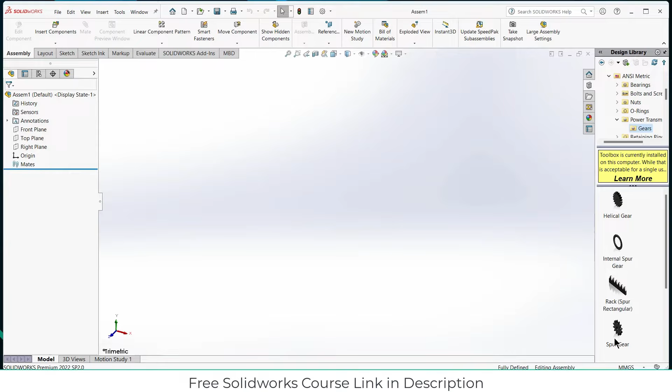So what will be the module and number of teeth? In my case, I will choose the number of teeth to be 40. 40 will be fine for me. Let's increase it a little bit more to 45. What next? Let's increase the width to 10.

You will know. So select this face, press Ctrl plus 8. Click on sketch, click on Convert Entities. Press Ctrl A, Ctrl C to copy the sketch. Click on exit mode, right click, suppress the motions.

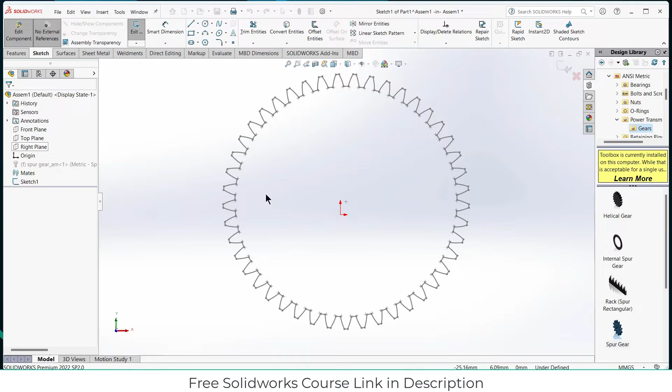Click here, click on New Part. Select the right plane, press Ctrl V. Features, extrude, 10 mm is fine. Click OK. Now delete this gear.

A question arises: why am I not using this gear? The reason is that I'm going to modify it. If I modify the library gear, it will ruin my whole library. So never modify this library gear, for example by doing an extrusion cut or something else. You will ruin your whole library and need to install SolidWorks from scratch. This is a common issue with me, and I really regret it a lot. So don't make this kind of mistake like I've done.

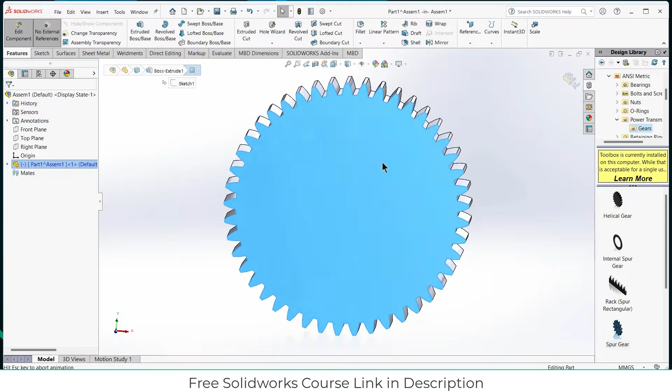Now let's create a hole, 10 mm. Extrude cut through all, and one thing: make sure that no external reference is checked on. This is a common issue that I saw many of my subscribers complaining about, so please watch carefully what I'm doing.

Now exit the edit assembly component mode. Oh, I have to make one more, sorry for my mistake. So I will go here, right click, edit sketch. I will make one more.

I guess here, 20 mm. Okay, 20 mm is quite far away. Let's make it 18 mm.

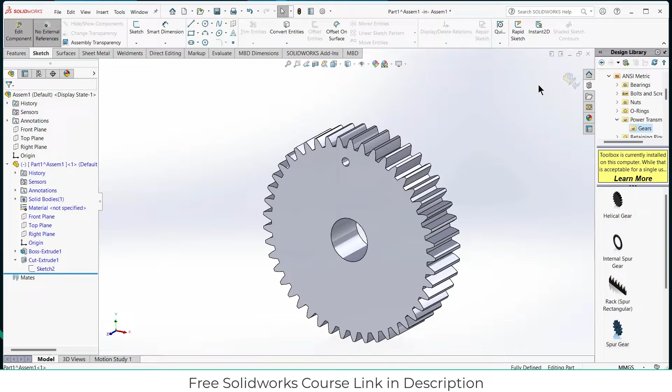Select this point and this point, make it vertical, and select this one and this one, make it coincide, and exit the sketch mode. I think it automatically picks it up. That's a good thing. Now first exit the assembly component mode, select the right plane.

Click on sketch. Now click on midpoint, draw the midpoint line like this. If I remember correctly, my gear has 45 number of teeth. So 45, 90. Let's make it 45 here as well.

Before I exit the sketch mode, escape. Select this one, make it construction geometry. Exit the sketch mode. Now if I drag it, I will use something called constraints.

Select this point and this circle. For some reason, the concentric option is not showing, because I want to make it concentric. Select this point and this point. Oh, the concentric option is there. That's basically what I want.

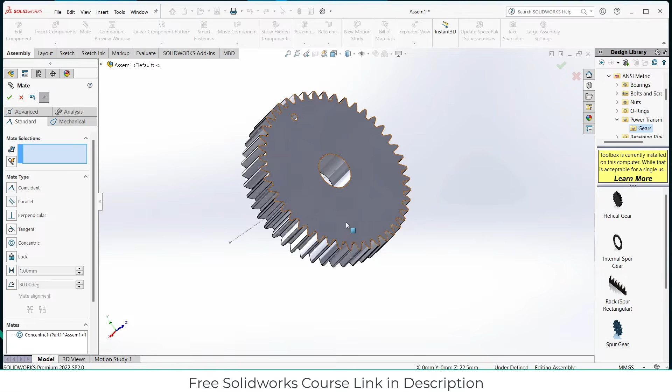Select this face, and what I have to do, select this one. Click OK. Press Ctrl plus 8. I press Ctrl and right click, drag this.

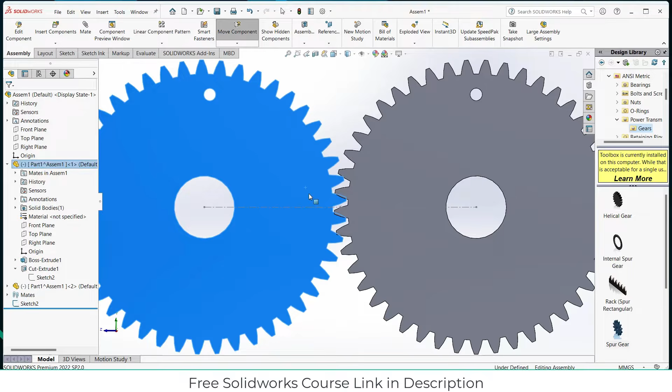Click on mate, select this point and this one, concentric, click OK, select and move this side here. Okay, it's rotating, that's basically what I want.

Select this face and this face, make it coincide. Okay, one step is done.

Now what do I have to do? Let's see, I think I have to use something called gear mates. So I will go to the mechanical tab, click on gear, select these two faces and click OK. A question is why I'm clicking OK - the value input here is wrong.

Here's the thing, the gear ratio in this case will be 1. So 10 by 10, or 100 by 100, or 1000 by 1000, what will be the gear ratio at the end of it? It will be 1. So that's not an issue. As you can see, it's also working quite great.

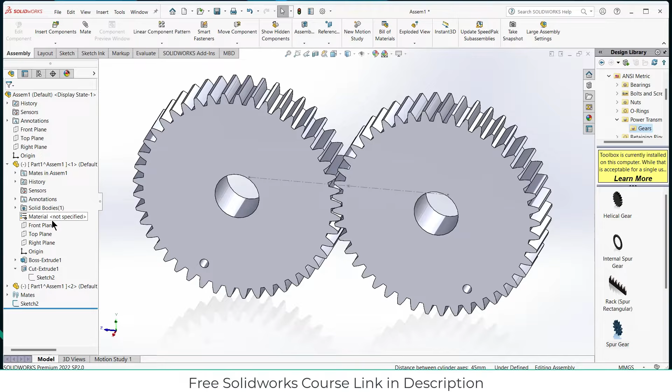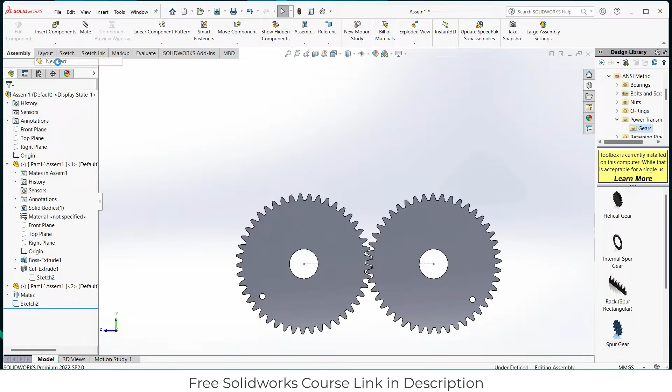60, 60, 45 divided by 2. Escape, select this point and this point, make it coincide.

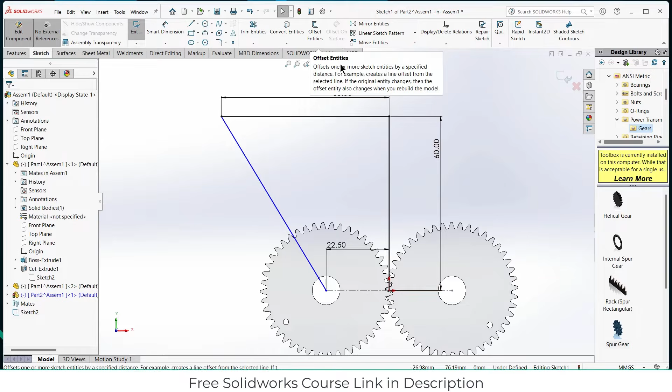Now what? Before I do something, select this line, make it construction geometry. Click on mirror entities - what I want to mirror is these two lines. About what? This line.

Click OK. Now click on offset entities, select this line. Click on bidirectional, click on cap ends. Reduce it to 5, or I think not, let's increase it to 8.

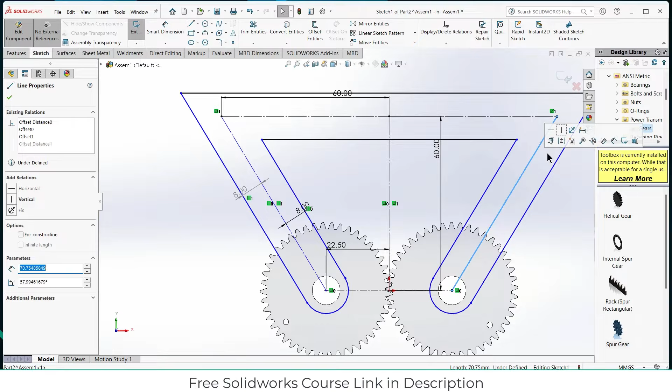Click OK. Now select the main line, construction. By the way, while I was doing the offset, I forgot to click make it construction, so there was a need to repeat the step - that was my fault.

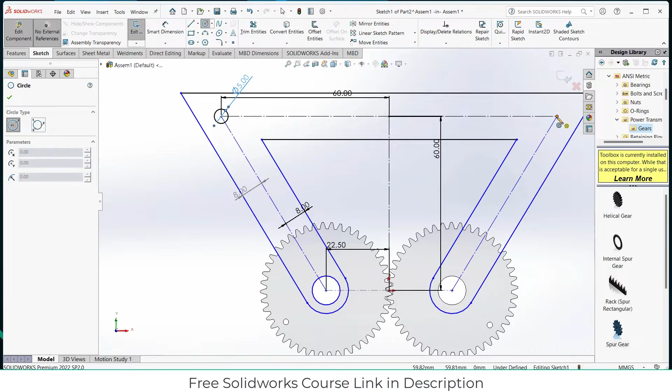5 mm is fine, 5 mm. Features, extrude - how much? 5 mm is fine. Click OK.

Exit the component mode. Make it back.

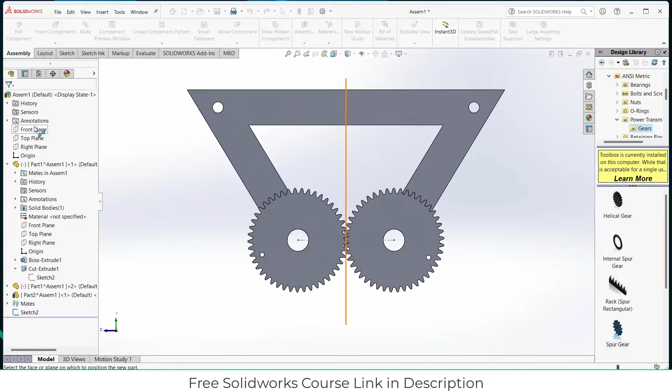Now what I have to do is click on insert component, click on new part, select the front plane. I will use this thing.

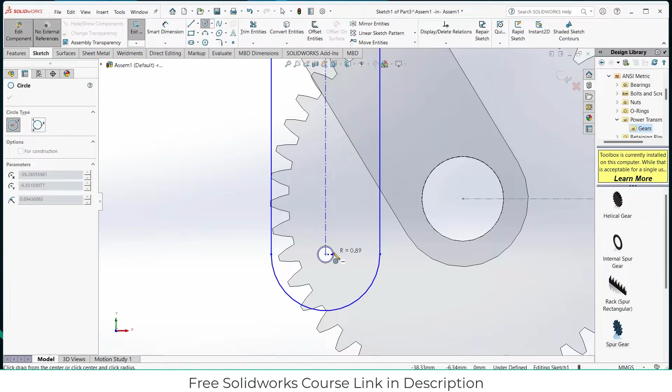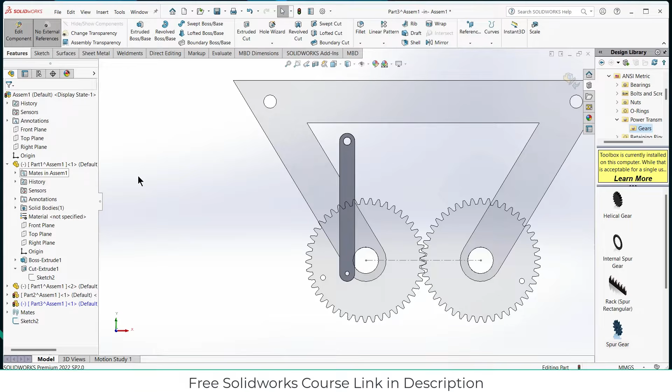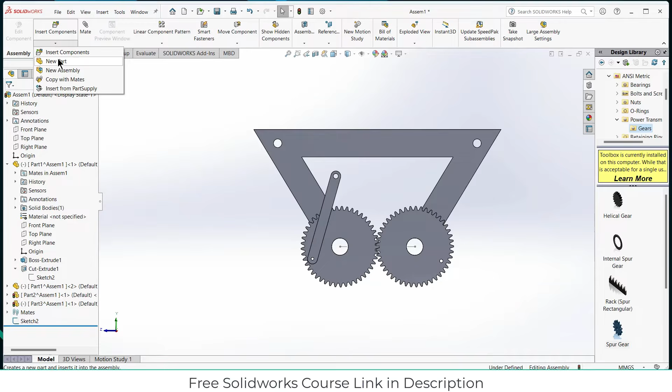Press Ctrl 8. Click on here, click on new part, select the front plane.

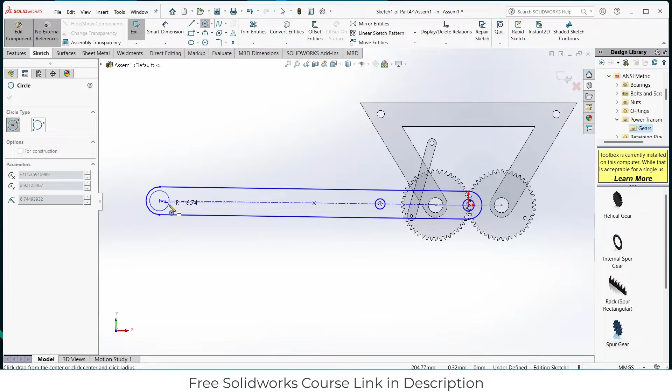50. 180. 4. 3. 3. 3. Extrude.

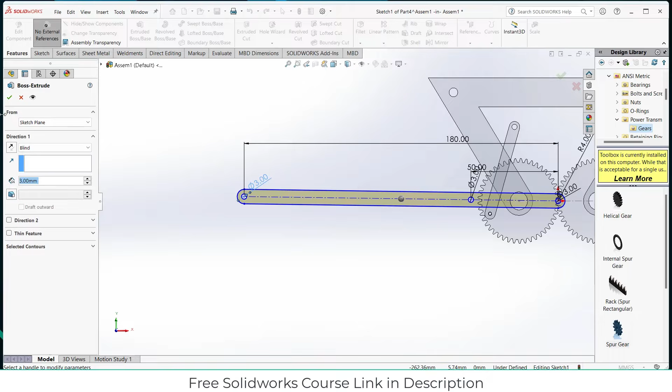Exit that is assembly component mode.

Let's just check for a bit. You know that we are on this, that I am on the right path. Looks good to me. Okay.

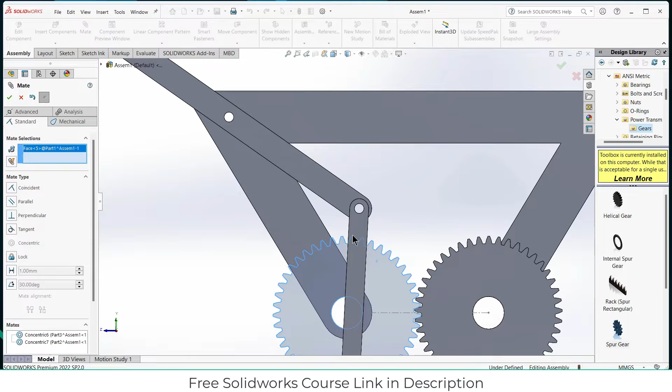You see, if I make a hole, I make another one, it will be an issue here. So I have to resolve it. So how should I approach this? Select this one.

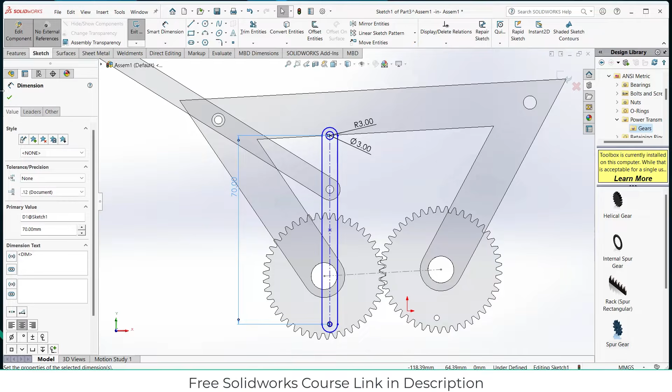Now it's much better. Now let's make one more hole in it.

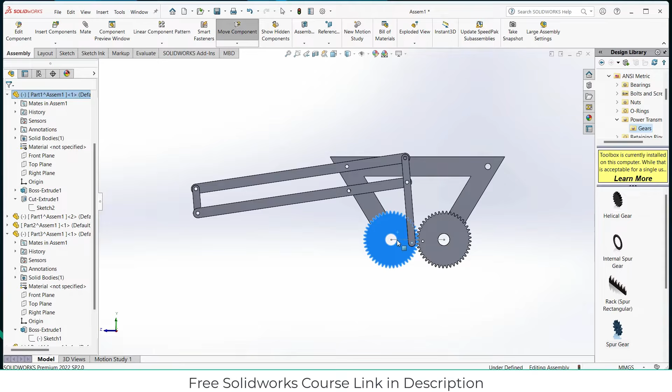Now I have to make two more links. So how should I approach this? Before I move forward, one thing that I have to do is I will select this part, go to its mates, concentric, concentric. Okay, I don't have to, I guess.

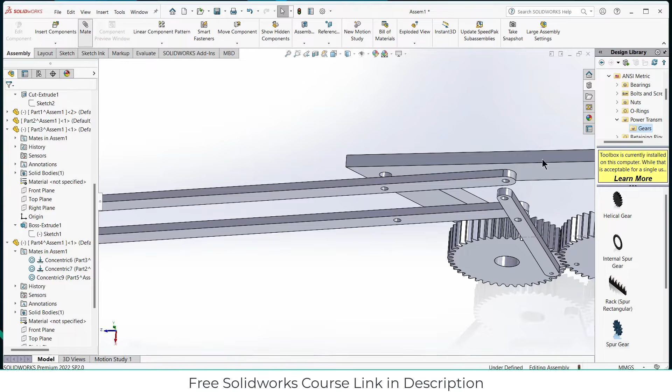So select this face and this face. Click OK. Now it looks much better.

Now I have to make something here. So let's see how should I approach it. Click on insert components, click on new part. Select this face, press Ctrl plus 8.

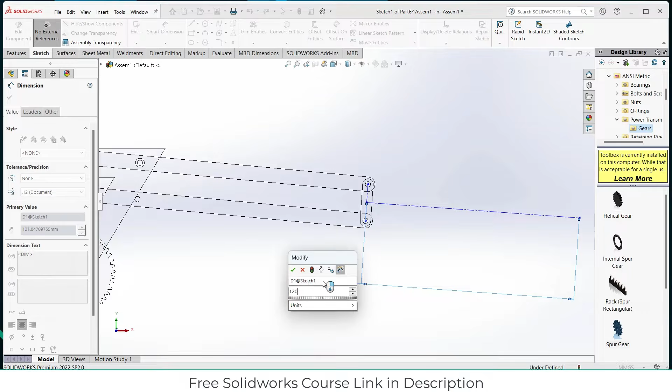No external references must be checked on. Remember that.

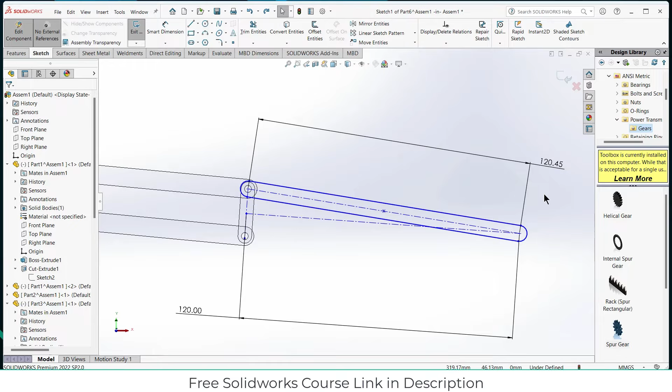Let's leave the length to that length.

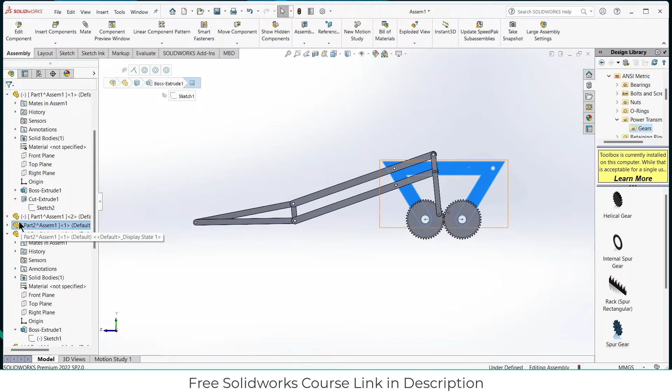We can make it better. Just let me click on this and click on edit part.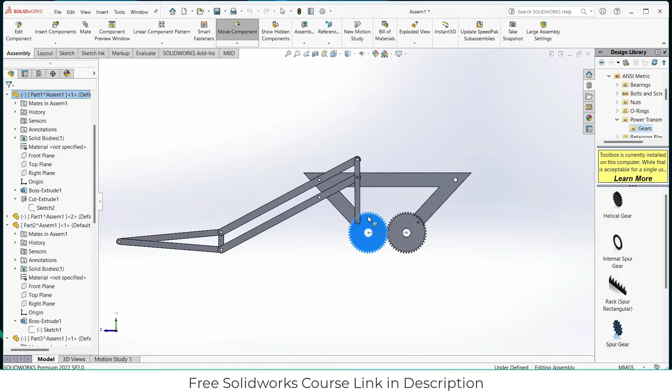There's one issue that I just recognized. Notice that this gear circle is not exactly in front of it. So what will happen if I try to use the mirror command, these things will not work, and I have to personally redo all the labor work again. So how should I approach this problem?

So what I'm going to do is, I need the mates, so it's okay. So I will create a new gear. Let's see how I approach this problem. And I have to delete all the mates again just to make it gear one.

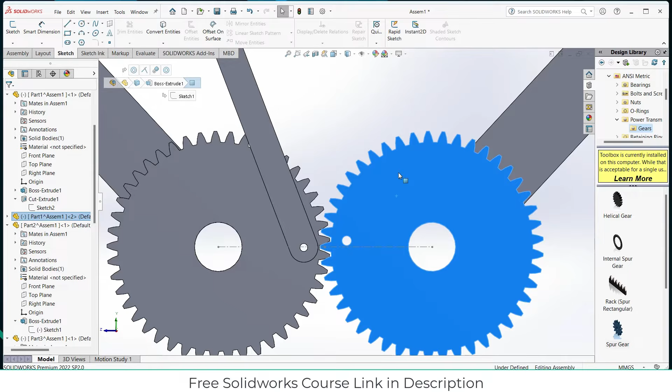So select this sketch and convert entities, press Ctrl A, copy the sketch, exit, new part, select this, press Ctrl V.

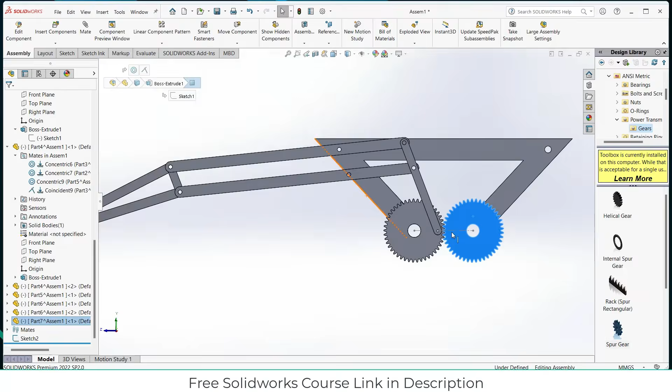Now what I will do to make sure that I'm correctly doing it, I will select this face and I will select a plane, make sure that I'm selecting the right plane.

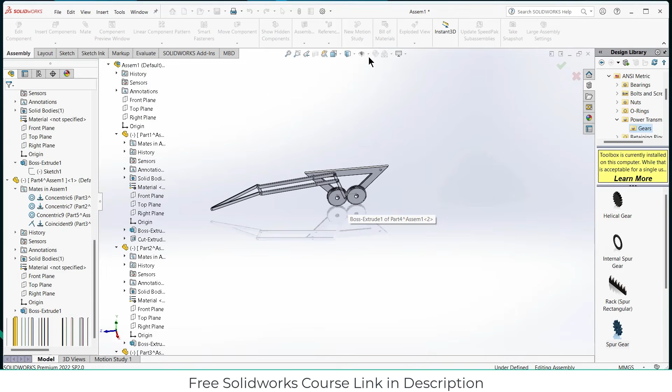Not tangential, click on view temporary axis.

Click OK. Remember, I'm going to delete this mate, I'm not going to use it permanently. So I will select this part, click on edit part, press Ctrl 8.

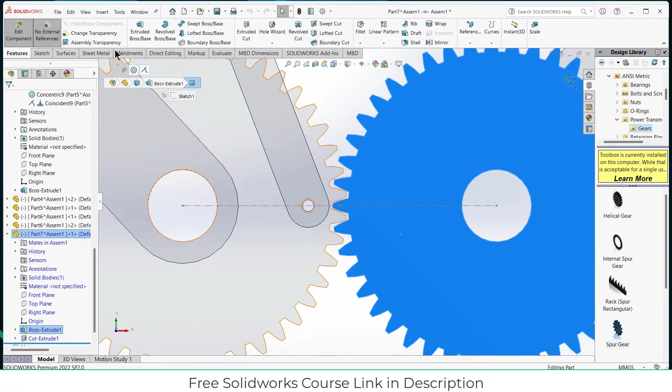To 18, extrude cut through all.

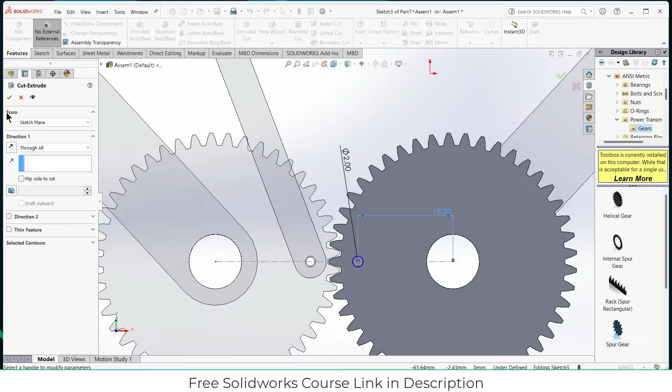Exit edit component mode. Now I will simply use something called mirror components, as otherwise it will be a lot of mess to figure out how to do it.

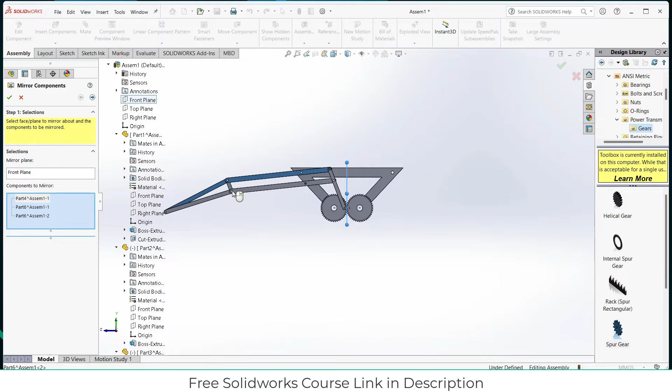Explain about this one. Looks good to me, click OK.

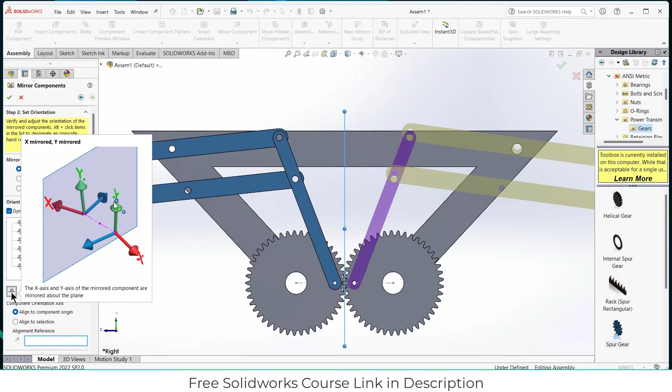There's some issue there, but what it is, let me think about it.

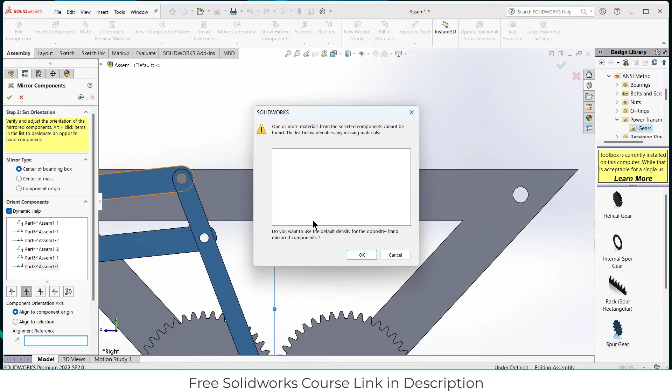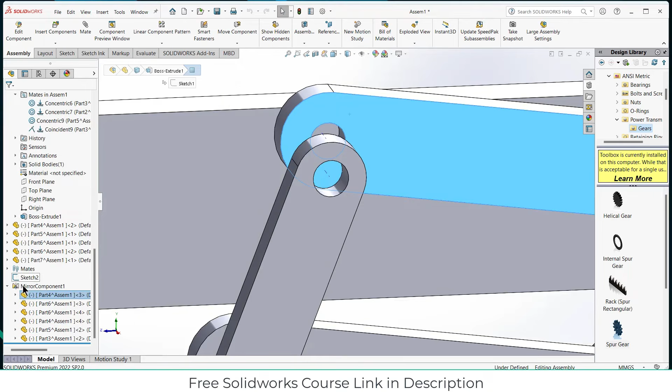Now, okay, it is fixed because remember the mate that we applied.

Which one is that? Suppose this. But why is it not working?

Okay, we can do one more thing, but it will increase the workload, not that much. So click on dissolve components, click on yes.

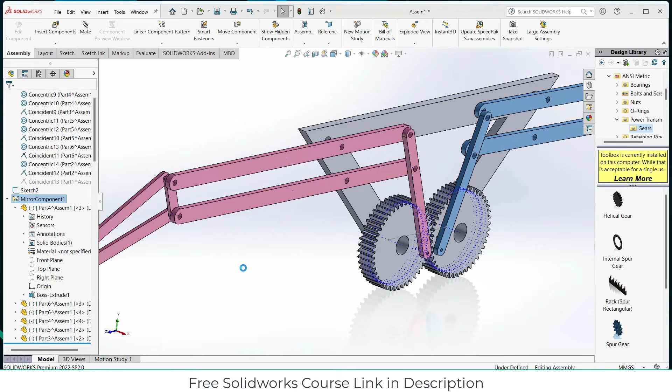Now what I have to do is do this mating part. So bear with me. Press Ctrl Z first, wait a minute. I think we messed up, let's fix it.

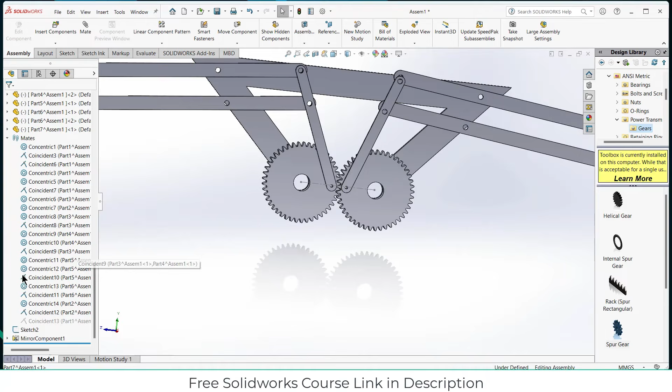Okay, this one, now right click dissolve mirror components. Okay, this thing is done. Now let's click on mates and do the mating part. Mate selection, okay, close this.

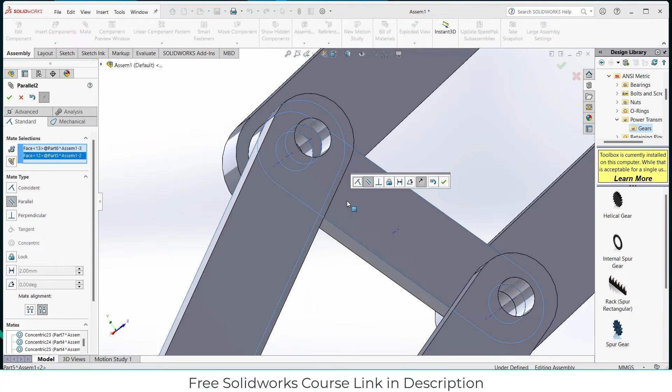Let's add in one more mate and I guess update the pattern. So which one? Gear mate. Just select these two faces. Gear ratio will be 1, so don't have to worry about it.

Press Control 8. It's working now.

Oh okay, one more thing that I have to do I guess, and select this face, select the value to it.

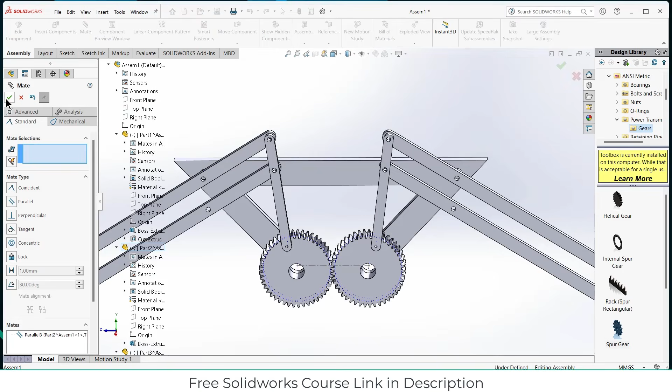Now let's try to do animate. So how should I animate it? So I will simply click on motor.

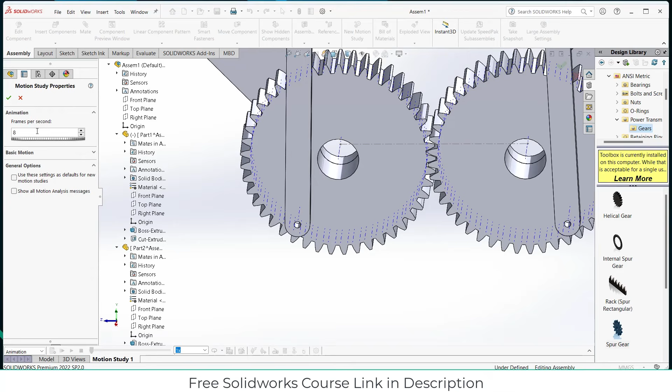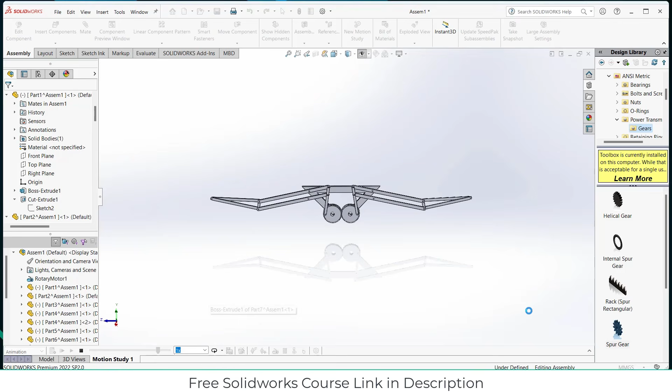Click on calculate. Right click disable. Click on play.

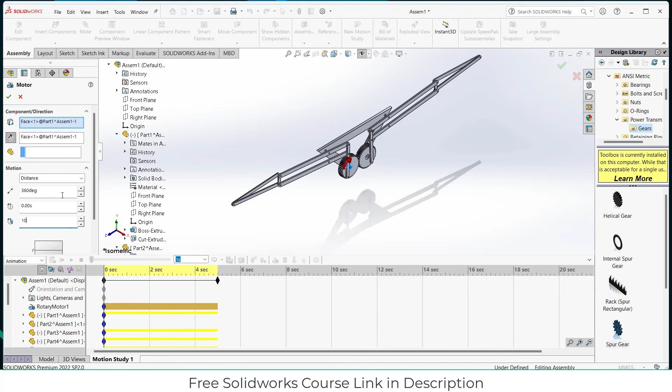Okay, calculate, it will take some time, then we are done.